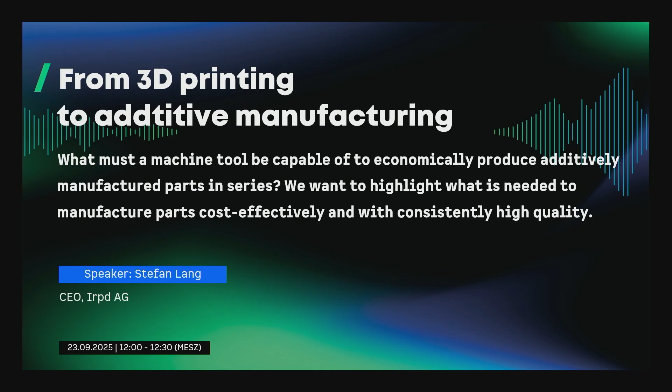So, ladies and gentlemen, we are coming to a super interesting topic, at least from my point of view. I have kind of an addiction to 3D printing, or I would rather call it additive manufacturing, but this is exactly what we want to talk about. Is it still 3D printing, or is it already additive manufacturing? And our next speaker will probably answer that question.

One quick question to the audience. We have a few here. Who already has a 3D printer at home? Nobody. Ah, there's one. Very good. So who is familiar with additive manufacturing here in the audience? A little bit, there at least. It's a fantastic technology, I can approve that.

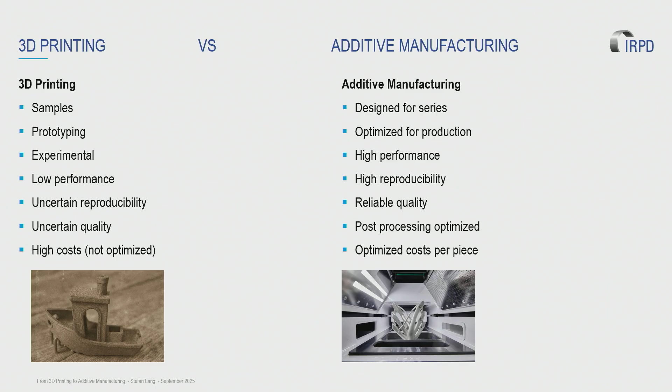So 3D printing is known for samples, it's known for prototyping, it is experimental, I would say low performance, uncertain reproducibility, uncertain quality, and as a result of all that, rather high cost.

Now, if we take a step to the side and look at additive manufacturing, this is a whole new ball game. In additive manufacturing, we design for serial production, not prototyping anymore, but small, medium series, even up to bigger series. There are companies who produce 250,000 parts per day additively. So this technology, after the hype, has now really arrived in reliable production.

It is optimized for production. It brings high performance, high reproducibility, exactly the same quality, part 1 as part 100,000, even if I print the same part 100 years from now, or maybe only 50 years, so it has become plannable. Reliable quality is also important. It's not only the output, but the quality which counts. And it's also optimized for post-processing.

Many of you who know additive manufacturing know the part coming out of the printer is not yet in the age of Star Trek, where you have a replicator and get from spaghetti carbonara to engine parts already finished. Additive manufacturing still requires post-processing, and that needs to be thought in already. And also important, as in the case I brought with me today, it is optimized for price.

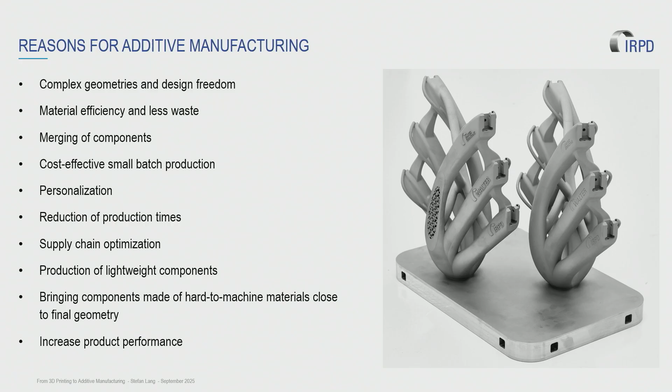So let's look at the reasons why you manufacture something additively compared to traditional methods. If you do milling, routing, turning, grinding, please stay with that process, because it's probably the most economic way of manufacturing. But if you need to solve problems where traditional methods come to their limits, then you have a chance of solving those problems using additive technology.

So we can do really complex geometries and design. We have material efficiency. I only need the material which is converted from powder to a part. All the powder which is not melted, I use again, for many different parts. It's not trash, it's not waste, it will be reused in the next process. I can merge components, as we'll see in the example I have with me.

I can cost-effectively make very small series, but also big series. I have the same repeatable cost. I have the possibility of personalizing items, reduction of production times. I can also do supply chain optimization. I'm not relying on a very long and maybe unreliable supply chain.

So that's also something I can produce in-house, the parts, and I'm not relying on any suppliers. An important factor, lightweight construction. If we are talking about economics, as I mentioned, I only need to convert the powder into parts where I need it. It's lightweight, and that brings also a lot of benefits for further use of the products.

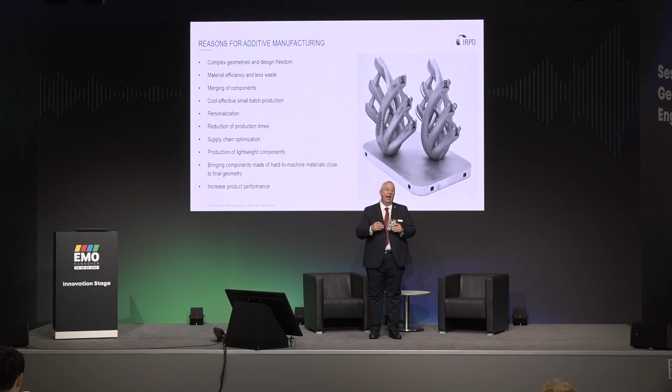What is also important, or maybe an idea, is hard to machine parts. I can actually make the basic structure with additive manufacturing and do the finish then with machining, with CNC, with grinding, with milling, which brings it then to the perfect shape. It's another game changer how I can optimize production. And last but not least, also to increase the product performance.

Let's look at the part which I really like. We did an analysis and I took this part with me. This is not my teddy bear I take always on stage, but this has to do with my presentation.

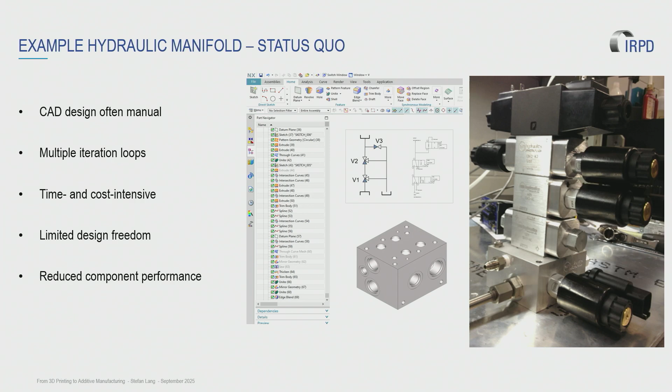If you look at this part, this is the original manifold for hydraulic distribution, and this is how it was manufactured in the past. We had actually 4 parts which were milled and then stacked together. They had to be mounted to get the functionality I have today with 1 part. Really complicated and iterative design process, complicated, long-term, many loops, and very time-consuming.

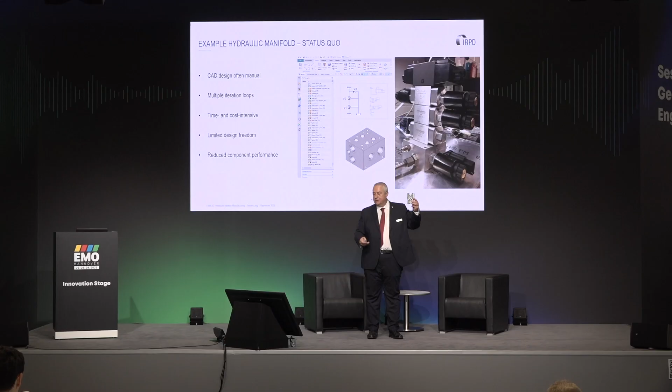And if you look at what is possible today, if we really use the technologies available today, then you can actually go for something along this line, which really brings a lot of potential. We have 90% reduction of design time. There are computer engines to design such parts, for example Grasshopper Rhino, where I just define the entry and the exit points, I define the structure, and automatically it will come up with a design which I can use for 3D printing.

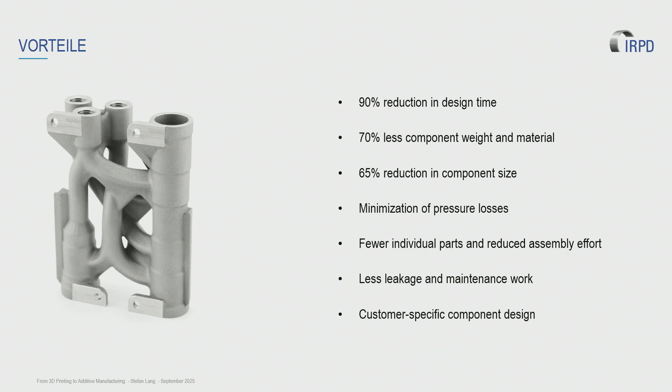I have 70% less weight in the final design, 65% reduction in component size, minimizing pressure loss because there is only 1 part, it's not 4 which need to be brought together, fewer individual parts that reduces the headache of stock keeping, and less leakage as already mentioned, and I can also do customer specific design, which is another advantage.

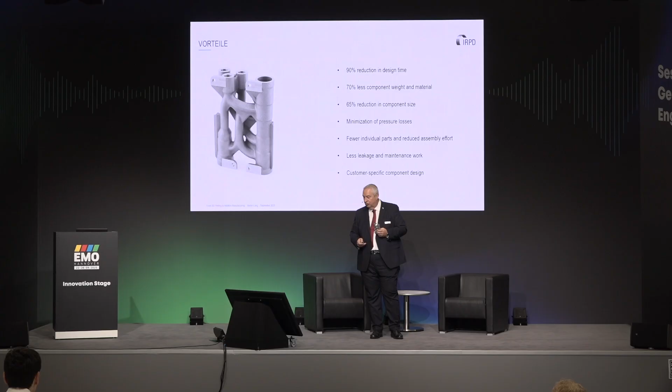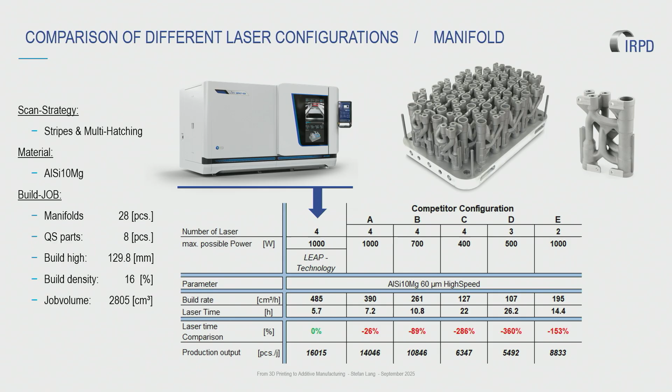If we look at the metrics, I mentioned serial production, and I have here an example. If I would like to produce this part in a serial production, just as an example, on our machine, I'm from IRPD, so I would like to emphasize the performance on our machine, I can do 16,000 of this part with just 1 machine. We are not talking about prototyping anymore, we are really talking about serial production.

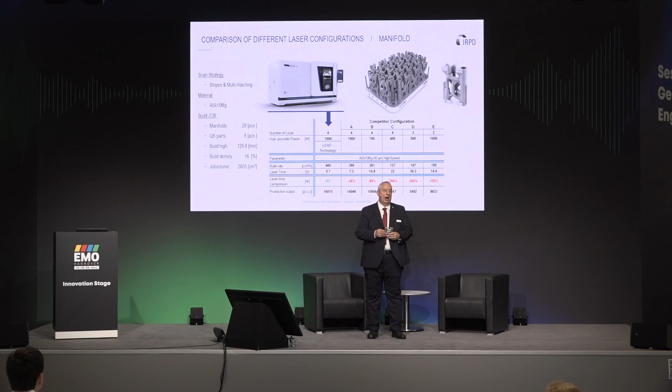So what does this look like on manufacturing cost? What is the benefit? I think this is something interesting to see. If I look at the printing cost of this part, we talk about 105 euros in a bigger series, and this was calculated with a serial size of 5,000 pieces per year. I get about 105 euros per part. The post-processing, all the machining, adds another 15 euros. This equals about 120 euros for the final part.

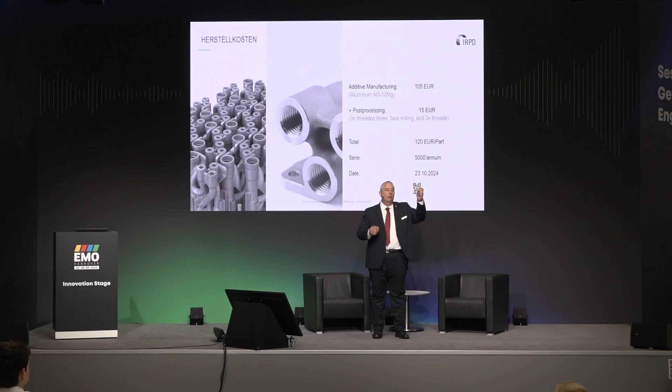So if we think additive manufacturing equals expensive, those times are over. Today we can already manufacture in a bigger series very cost efficiently. If we compare this part, any guesses how expensive this part would be in traditional manufacturing with the 4 different elements put together? Any guesses from the audience? I can resolve that for you. It's also 120 euros, but it's not only the price, it's the performance, it's the lighter weight, it's all the benefit you get through additive manufacturing, which really makes the difference.

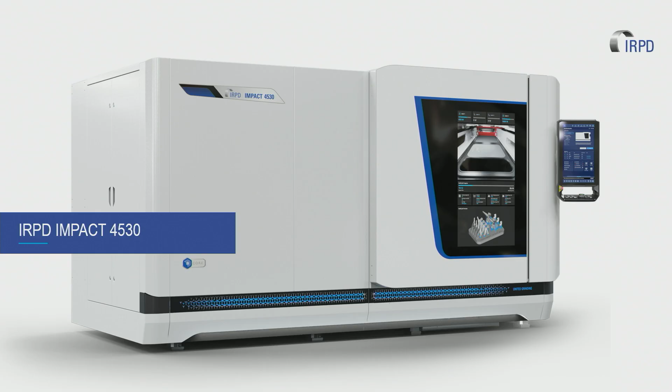And how is that possible? This becomes possible with the machine. I'm very proud, I'm the CEO, this is my baby. This is the Impact, the 4530. The name already indicates we have a building size of 450 millimeters by 300 millimeters by 400 in height. So quite a sizable production area I can use in my machine.

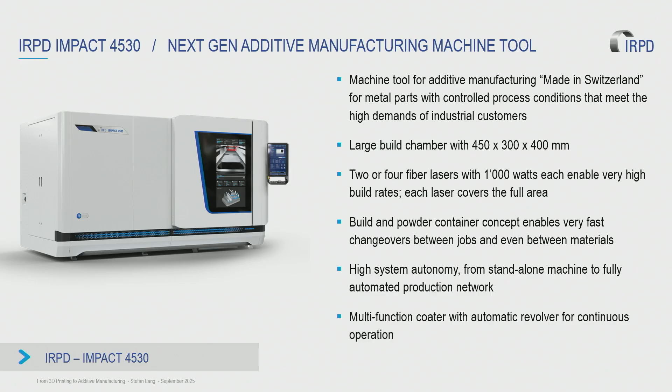This really is a game changer. We are here not talking about 3D printing, we are really talking about additive manufacturing. Additive manufacturing requires a machine tool, and this is just a different category. And if you are visiting us at our booth in Hall 11, booth E45, you will see what I mean with a machine tool. It is 9 tons of solid engineering, and this is what you need to create such parts, 16,000 per year, in a very reproducible manner.

So I already mentioned quite a large build area. I can stack many products onto one building plate. I have up to 4 lasers with 1,000 watt of energy, so 1 kilowatt. Each laser reaches every spot on the building plate, so also highly efficient. I get a very high output. I can build in 30, in 60, in 90, or even 120 microns per layer and really get really fast results, and even with that, a nice surface.

So after my presentation, if you would like to have a look at the part, I'll be here in the area. You can certainly also have a closer look at the final product itself. So I have actually prepared a small video, maybe as a teaser, or come to our booth. This is the machine, how it's built.

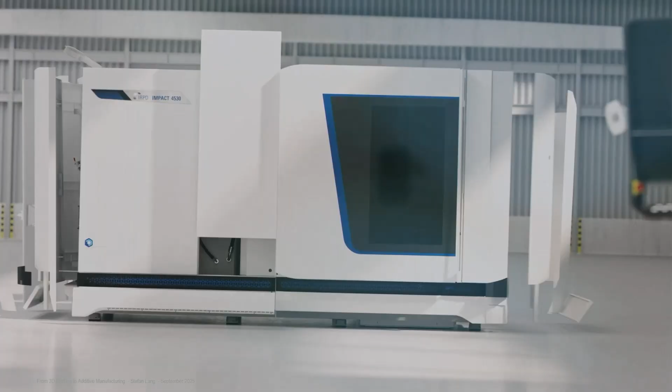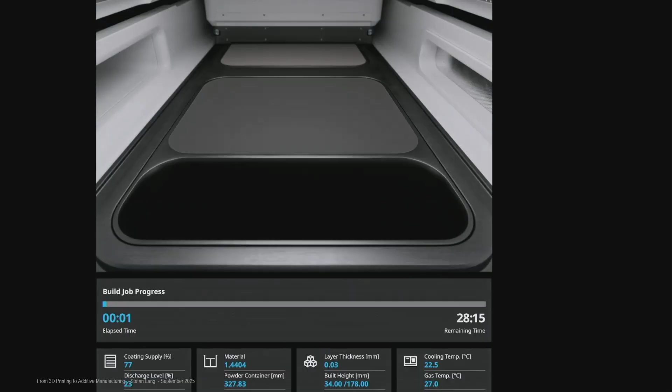And we are very proud. It's a Swiss-made product, engineered in St. Gallen at IRPD and built at Studer in Steffisburg. This is also in Switzerland, close to Thun. We have a concept with containers. So we are moving in containers. So this is very efficient. We go job to job in 15 minutes. We can go material to material in about 4 hours. And this is really a workhorse. This is a machine tool for additive manufacturing.

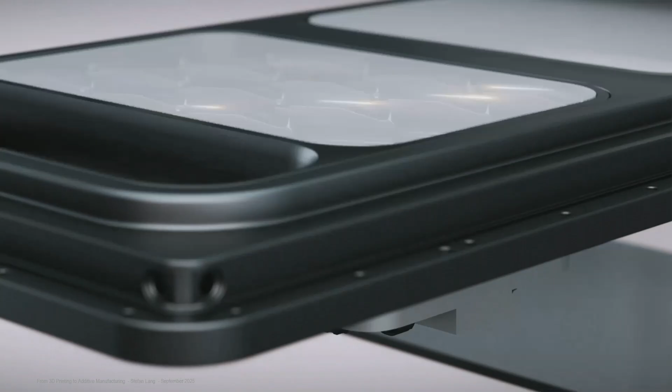Here you see how really the part is growing layer by layer. It's always the top structure which we are melting with these 4 very powerful lasers, and then the structure grows, and at the end I have a final part. I do have a container which is filled, and here maybe you can see a little bit the secret on the inside of our machine. What I would like to show you, number 1 and number 2, this is our container concept, and this is really allowing us industrial production.

We have number 2, this is the powder container. So we have a filled metal powder. It can be different steels, it can be aluminum, it can be titanium, it can be Inconel. So everything which is weldable can also be powderized and used on our machines. The materials I mentioned are those used today, where we can also provide recipes, but that's not the end. Every new week there are new materials coming to the market, and we gladly support your needs, your process on the material quality.

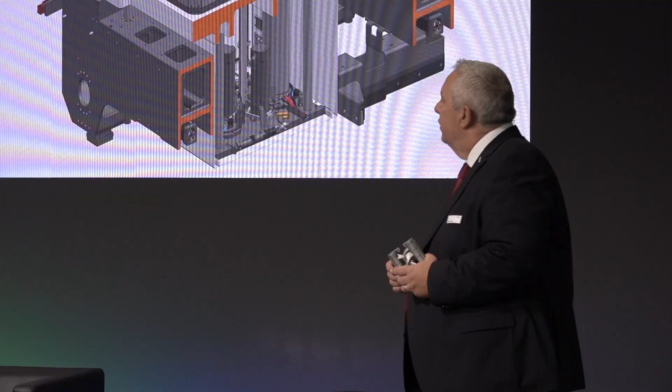Number 1 is also important. This is our build plate or our build container. And this has 2 parts. One is the overflow: if we move the powder with the coater from the powder container to the build plate, of course there will be some leftover, and this will fall into the overflow for recycling, so we can later use the powder again for the next process. The important one is number 1, the bigger size. This is my build plate. There is where the magic is happening. There I'm building layer by layer.

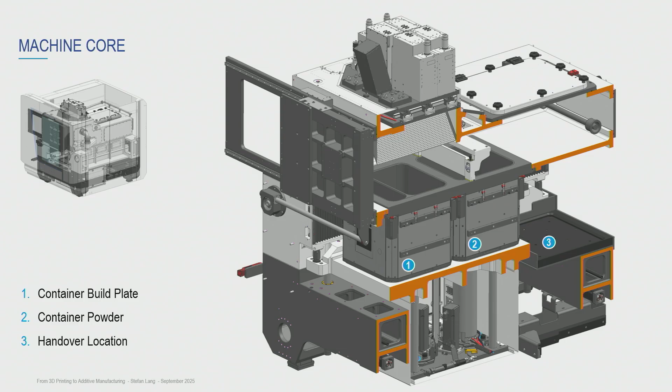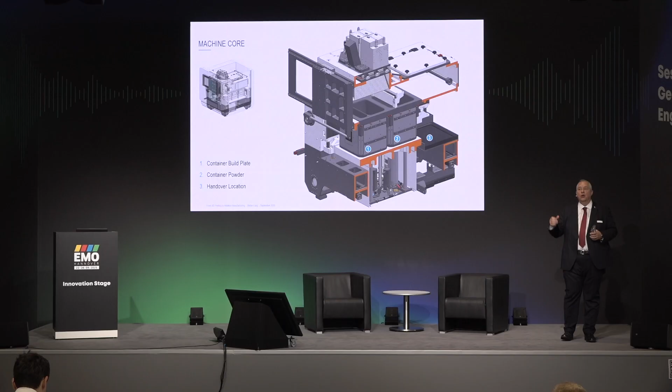Interesting, with the machine concept, I can feed containers from the back. So already in the DNA of the machine, you have automation. As soon as the job is done, the containers are closed. We put a lid on the container. They're filled with inert gas or shielding gas. We close them, we exit them from the machine. We insert a new set of containers, and within 15 minutes, we can go job to job. And through the feeding, through position 3 on the back of the machine, we can even automate the process, and that really allows us 24/7 operation, and this is really what, in my opinion, defines a machine tool.

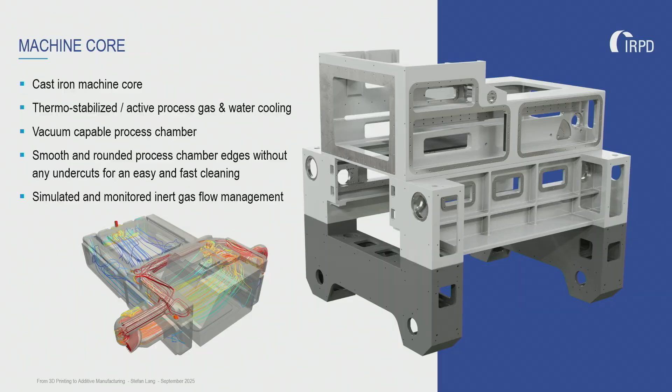A machine tool doesn't only mean fancy technology. A machine tool is also rock solid, and this is what you need for really reproducible production of additive manufactured parts. Our build core has a weight of 6 tons. And this mass you need. If you look at any other company offering additive manufacturing machines, or I would call those 3D printers, they are not as solid, but you need this solid core to have the stability, to get very nice surfaces, to get reproducible results.

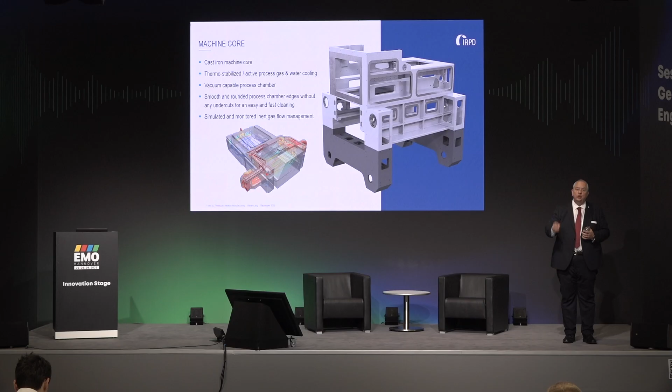And also this build chamber is not only mechanically stable, but also temperature stable. We are using the shielding gas plus water cooling to make sure that during the production process of typically several hours, we can maintain the same environmental conditions, ensuring that we really have a reproducible, good quality, which is fit for purpose.

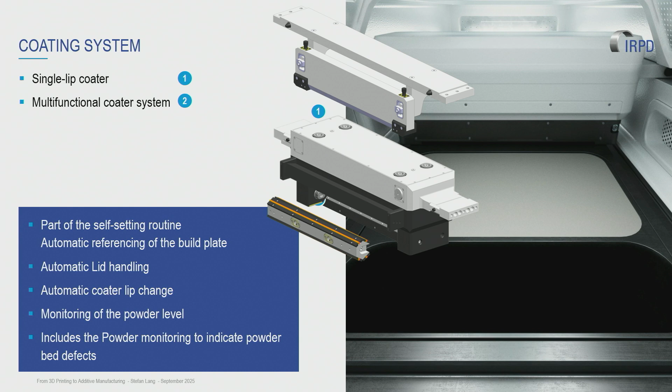One additional thing I would like to mention, which also has to do with serial production, and this is also something new, which you will not find in any other machine displayed here or at any other show. We call it the multi-function coater, and this has a specific design. It is packed with sensors to measure the build plate. It has the function to lift and to reattach the lids for the containers.

And last but not least, you see the drum on the lower side of number one, or number two. This is the multifunction coater. Anybody familiar with additive manufacturing knows it can happen, especially with a material such as Inconel, that the tension in the material makes a part stick up. And what that does is you get a dent on your coater. A coater is like a lip, a very soft lip, which we use for distributing the powder over the build plate. If that has a dent, we recognize that.

We have cameras on board. We have monitoring of the powder bed. If we see any anomalies in the powder bed, without opening the unit, we can automatically switch to the next coater lip, really offering 24/7 operation. Our competitors, if they have a lip failure, need to reopen the machine, they need to leave the vacuum, they need to leave the inert status.

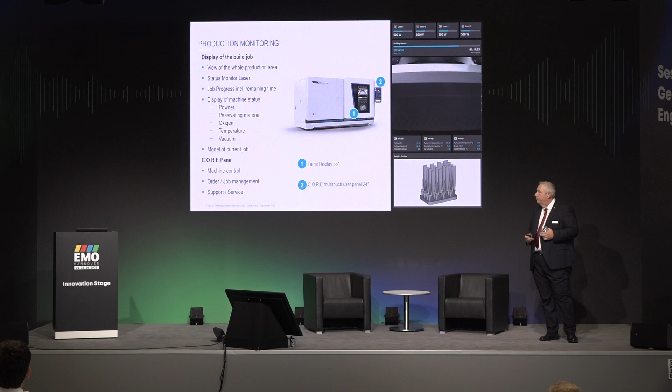We can just continue: we void the part which has caused the problem, we apply more powder, and we can continue the process. And our build job, which is running for hours, we can save and still have very good parts. So this is really what I mean by a product which has the capabilities of a machine tool. Here you see how it looks in our machine.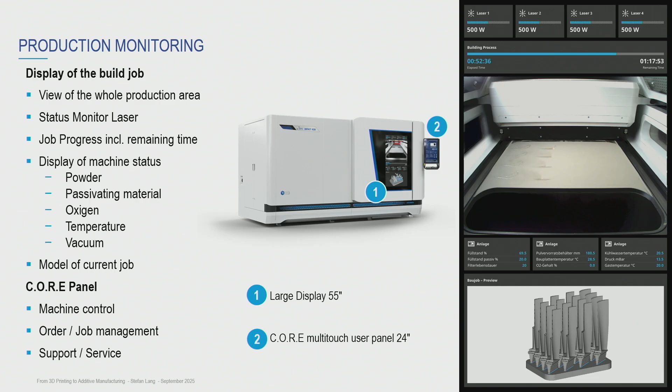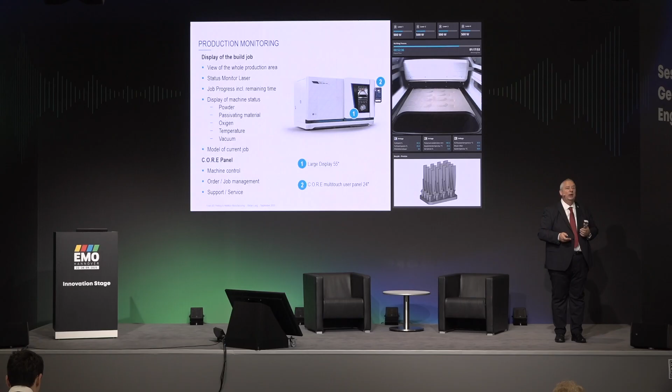This is just a display, but you can see in this picture the 4 lasers, 4 times 500 watts, very powerful. The lasers can reach any place on the build plate. And you see in the picture here, the lasers are working. Each has products or final parts assigned. This is one way it can be done, but we can also work with several lasers on one part if we have bigger parts. This is called multi-hatching, and our machine can do not only many small but also big parts, and multi-hatching is really the key to very high productivity.

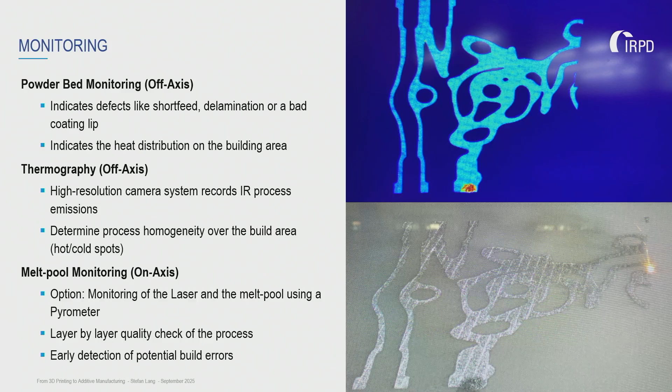Besides the productivity of the machine, it's also important that you get very good data, that you get reliability, that whatever you have built, you have the confidence that it has excellent quality. And that's the key, and I think that's the second criterion for a machine tool: the quality which comes out of the machine. We have different technologies built in. We have an on-axis camera, an off-axis camera, pyrometers, a lot of sensors, and with every build job we provide so much data that afterwards you have certainty with the job report.

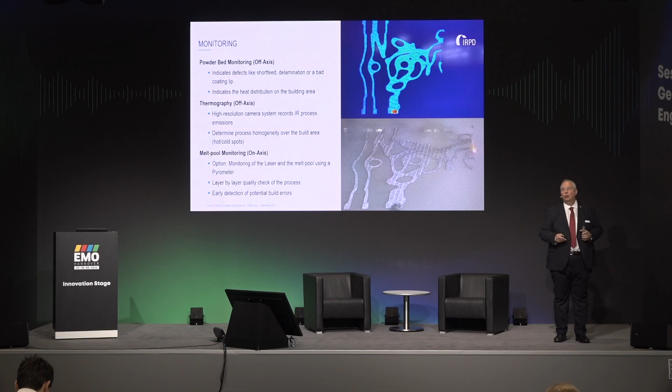You know exactly at what point in time you had heat, where, how the heat distribution was, what the oxygen content was. You can set limits, and if you are within the boundaries, you have good confidence that your product is reliable and fit for use. And that's another factor besides productivity: this monitoring to ensure that you have excellent product quality.

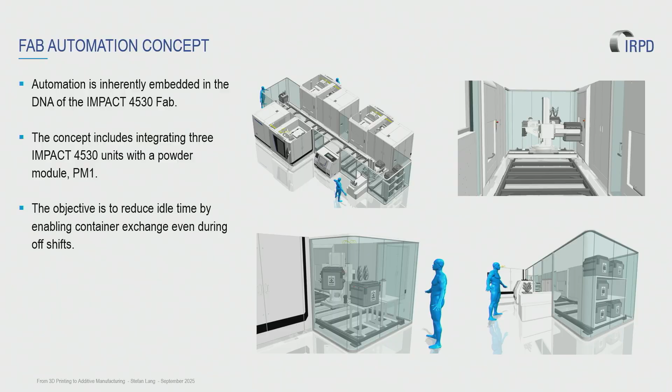The third component for a machine tool, in our opinion, is automation. So for the first two things, we looked at productivity and quality. The third thing is automation, because a machine tool you want to use 24/7 for several years to really get the most out of the product.

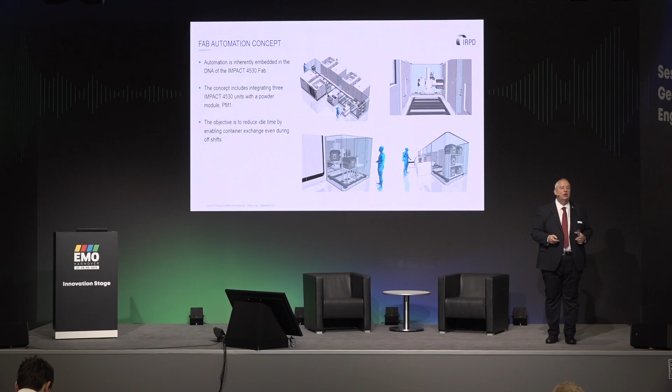This is just a concept, but it's in the DNA of the machine, how it was built, that this container handling can be fully automated, that we take containers from the machine, we reapply containers, we continue the operation, and that's actually the third factor why we can, with good confidence, say this is a machine tool for additive manufacturing.

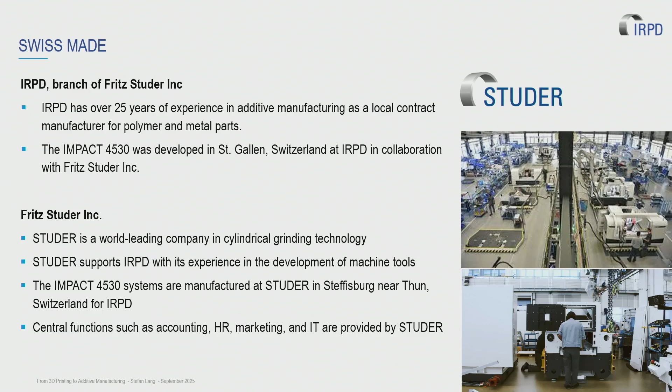The products are made, and here you see actually a glimpse into our production. The products are 100% Swiss made. We have the development with a team with IRPD in St. Gallen. We are a team of engineers. We have all the R&D in St. Gallen. We have the sales department. We have after-sales service. That competence we offer in St. Gallen, Switzerland.

The machines are built at Fritz Studer, which is probably a very well-known name, certainly one of the leaders in machine tools. And these two knowledges, our 25 years of experience from additive manufacturing, plus over 100 years of experience in machine tool, we have added that together, and the result is the Impact 4530 machine. And this was just a glimpse into the production capabilities we have.

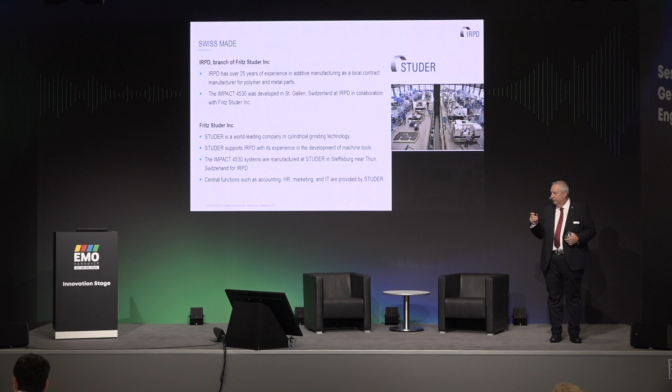With that, I have summarized, and probably I went a little bit ahead of time. I would be open if there are any questions, if there is anything I can further say. And at the moment, maybe I can run down, or there is actually a question in the back. Would you take that question and bring it back, or how would that best work?